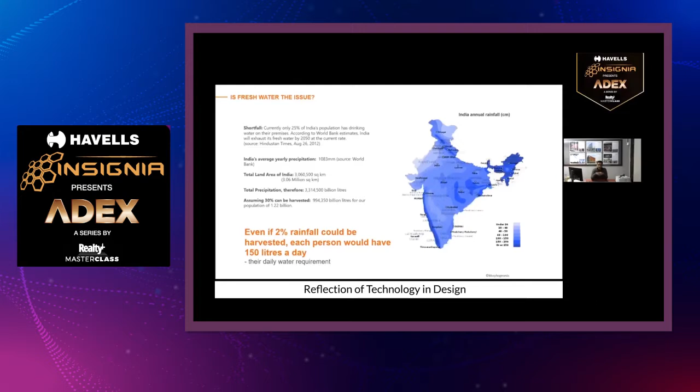We were looking at our cities and our buildings, and we had developed this sort of system where our buildings would consume energy and consume water and generate waste, and it was a one-way flow.

Uniqueness is about a set of metrics which looks at tradition, heritage, and culture. That third philosophy rose from the fact that across India, given that construction price points are extremely frugal, everything started looking the same. It didn't matter whether you were in a cold, temperate, hot, or warm humid climate, most buildings started looking the same, because they were adopting processes of construction and design that allowed for that to happen. We found ways of digging into the past to find ways to build the future, and that's where we got the unique.

And livability was essentially about engaging not only the client and end user of our buildings, but trying to engage the people who built that building.

Now, CO2 emission and fresh water, this is all benchmarked to the ECBC, the Energy Conservation Building Code of India, which is like a green building standard. Based on those standards, all our buildings go through post-occupancy evaluation, and we keep track of those numbers, of what these buildings are achieving today, over 2.5 decades.

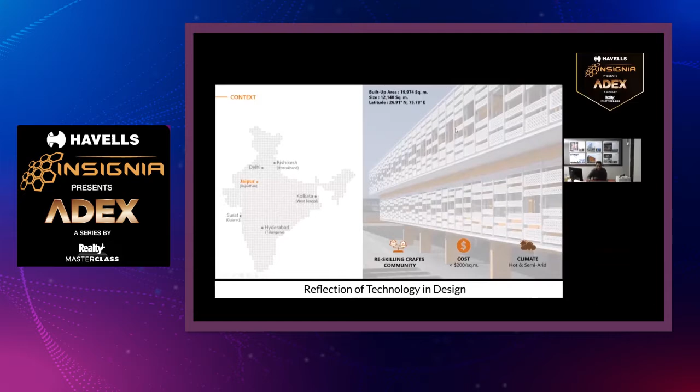The first, of course, was cost. I'm sure a lot of people here may not be familiar with cost of construction, but this project was built at $200 a square meter with all interiors and all the energy infrastructure, everything all told, which was virtually impossible at that time. And of course, a climate like Jaipur, which goes up to 48, 49 degrees Celsius in summer but can drop to close to zero at night in winter. We began thinking about how we were going to be able to build this building.

The first thing that came to our head was to throw out the air conditioning. Because once you throw out the air conditioning, you reduce all the electrical equipment, but more so, you reduce the fact that power generation is also done locally with diesel generating sets, and you get rid of that too. We studied a lot of traditional architecture. We used computational models to understand how step wells work, why they're cooler at the bottom than the top. We understood evaporative cooling, jalis, ventilation, shading.

So we mapped out a 200-kilometer radius. We said every material we use will come from that, because transportation costs are extremely heavy.

The other thing we discovered at the time was that the temperature of the earth about 3 meters below the surface equals the average temperature of the region. In Jaipur, which goes from 0 to 48, 49 degrees, the average was floating around 25. We said, that's very useful — which is why step wells, if anyone has visited India and gone down into one, naturally feel cooler, because earth banking along with evaporative cooling is a phenomenal cooling mechanism. It's an underground air conditioner, naturally driven.

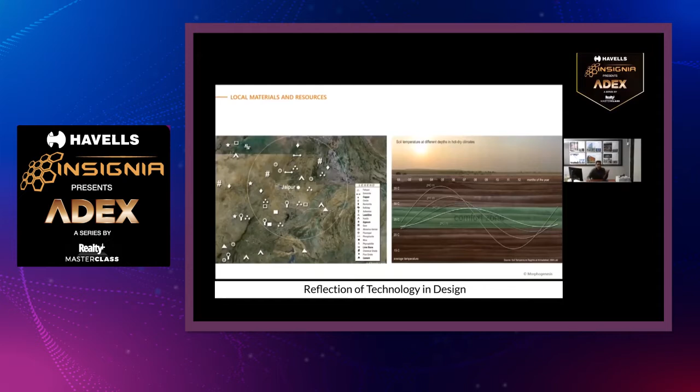Typically, any institutional building in India would be built as a block, with open space around it for recreation. But in a desert climate, that open space is really worth nothing, and these large outdoor spaces become mostly unusable through the year. So we said we won't build vertically — we'll spread the building out and use the whole building as shade, like a tree, and therefore the space under the building becomes viable. We did a very optimized, simple rectangular form, the idea being to decrease the surface area exposed to heat gain.

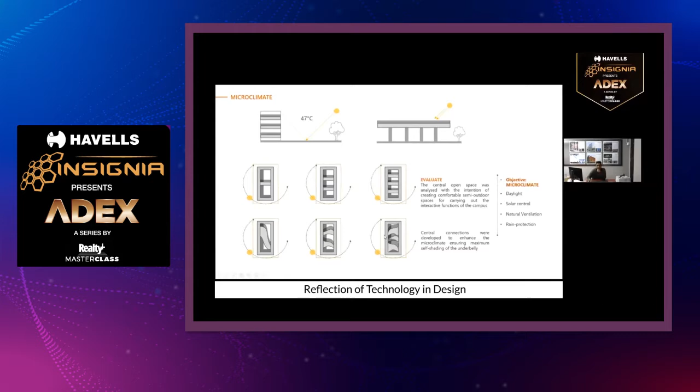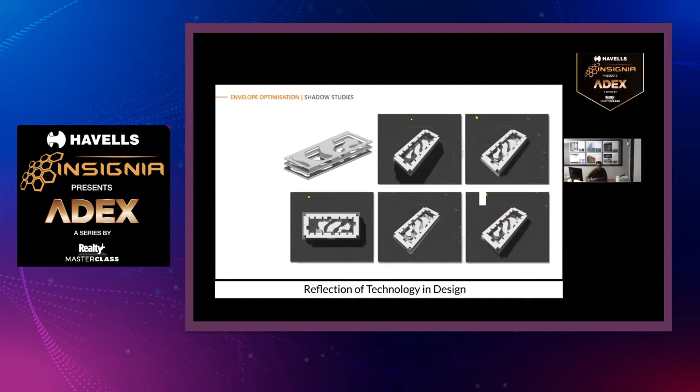And we went through a series of courtyard morphologies. The idea really being to keep the sun out, but let the daylight in. I'm not going to show you these diagrams, all of you probably know them very well. But the idea was to develop, and because it was a design and fashion school, the emotional element was that if you were inside this rigid form, driven by our environmental criteria, the courtyard should not be a rectangle and enclosed. It should flow freely like a Mobius strip. That was the model when we began about a decade back.

To achieve the parameters of no air conditioning in a desert climate, we sunk down 3 meters. We recycle all the rainwater, and we recycle water from the toilets by filtering and using a treatment plant. And we created our own step well, a Bavli in effect, which allowed for evaporation through the courtyards and cooling the building internally. That negative space, if I may, was pulled out of the program.

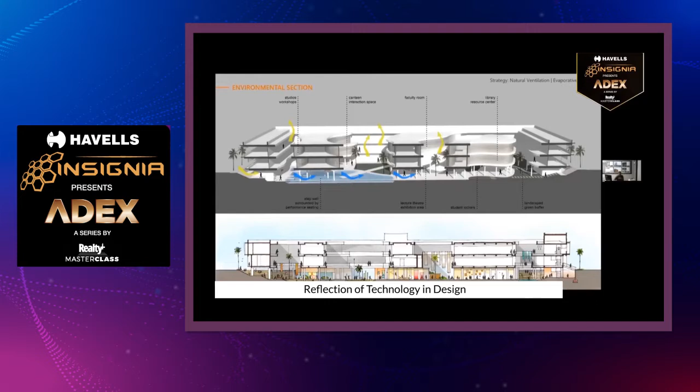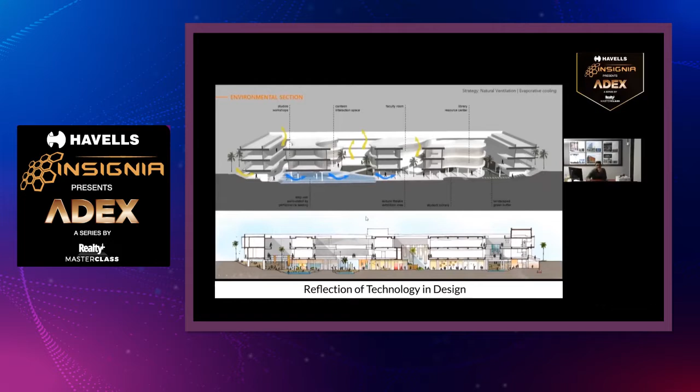So we were supposed to build about 25,000 square meters. We did, we built about two-thirds of that. And that entire area underneath, which to date operates at about 28, 29 degrees Celsius naturally, is used for an outdoor cafeteria, for various functions, performances, etc. That whole underbelly section was designed to do that. These are just some of the pictures of that step well that we created.

All the water is harvested, not a single drop of water leaves the site. We were just trying to work with limited resources effectively. And obviously the whole thing sits in shade, it captures the wind flows and cools the building down.

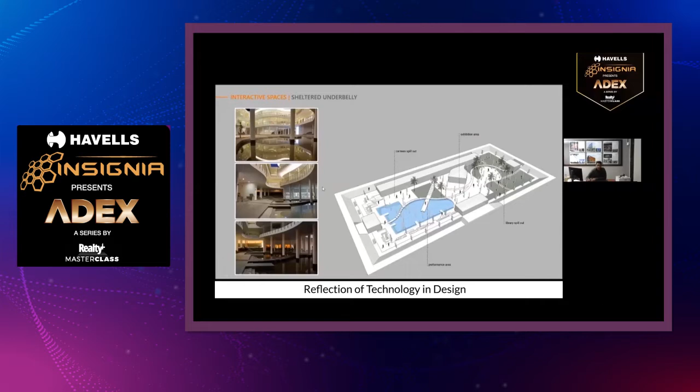We looked at insulation. Insulation was very critical for a project like this in a desert climate. There was a local community that made pots. We couldn't afford the expensive 50 mil glass wool or rock wool insulation, and we thought that pots, which were used traditionally, would make for great insulation, because air is a great insulator. We use these inverted pots with a layer of screed on top for insulation. The pots were made on site by this local potter community.

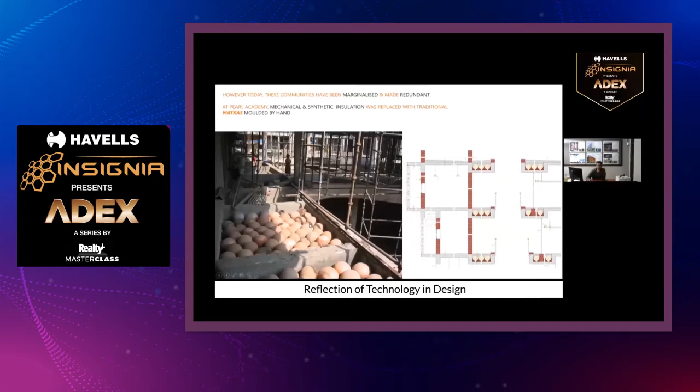For the external skin, we kept our window to wall ratios very optimized. We're at about 20 or 25%, providing adequate daylight. And we created this buffer space, which is essentially a service space and a screen. The screen is made by a local community who make cement concrete jalis on a very simple system, and we ran all the services on the outside.

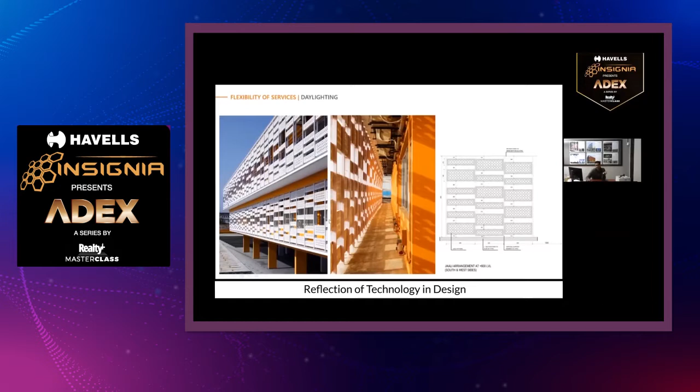So the screen allowed for the fact that the entire windows go blinds-free, and the design of the screen changes based on the orientation. All the services are openly accessible. The sprinklers run here, and we use the sprinklers as a facade cleaning system, because once a month they're supposed to test and flush it, so that cleans it up. And that's the building when it was finished about a decade back.

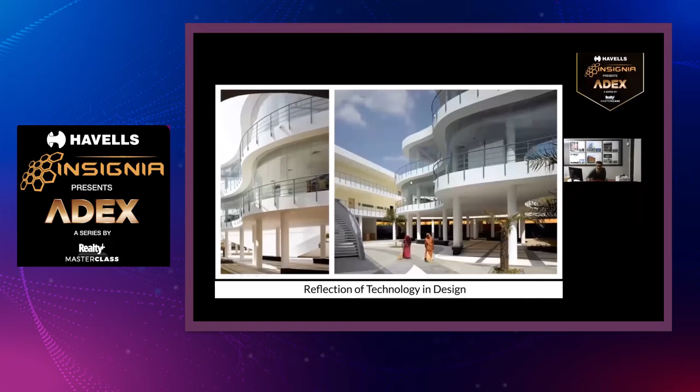So all the materials, the stone, everything here was from within a 200-kilometer radius. We did achieve the price point.

And this building went on to become very popular with various schools of architecture. They've gone and studied it. We've had students from various programs and masters programs studying sustainable design, recording temperatures and seeing it. And for the last decade or so, consistently in the summers, when external temperatures have hit 47, it's hit 29 degrees inside without air conditioning. It runs on an energy performance index of about 25 to date. Very simply, we get the bill that just divided out.

And whilst it was being built, it gave a certain level of employment to the local community, and that gave us a lot of inspiration.

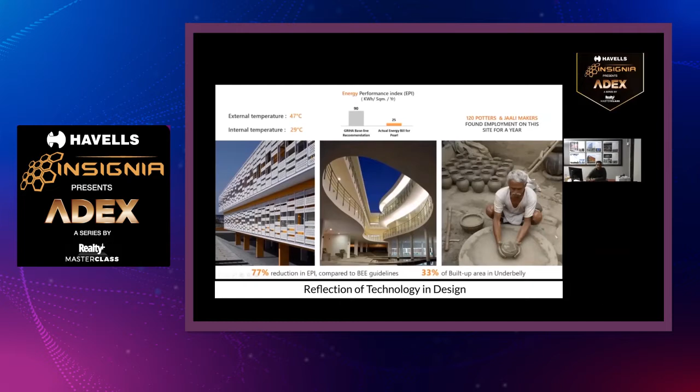And we thought that, if it was possible to get an 18 degree delta by passive design, and it was possible to create something at these price points pushed by the adversity of price, then what is it that we could do as we moved on? And that's when we started putting more formal metrics.

And which is why I'll jump to a very different kind of building, which is the British School, in Delhi. That's a composite climate. And here budget was not an issue. Our brief was, to begin with, because it was the British School, that they wanted it to be centrally air conditioned.

All British schools, pretty much all across the world, are either centrally heated or centrally air conditioned. We argued that if we can begin to achieve as much as we can naturally, then we will do so. This project started about 6 or 7 years ago.

We then spoke to the clients, which was essentially the High Commissioner and the board, and we said, why don't we look at this 5-acre site and try to do India's first net zero energy, net zero water, net zero landfill waste-to-landfill kind of building. And I said, fine, let's give it a shot.

So we did the math on the water, and from the 5 acres of land we had, I won't go through the calculations, but we could support a population of about 1,300 students. We said we'll do this in reverse. The notion of carrying capacity comes from the fact that what the land can afford in terms of water and energy is all that we will build. And 1,300 students worked very well for them.

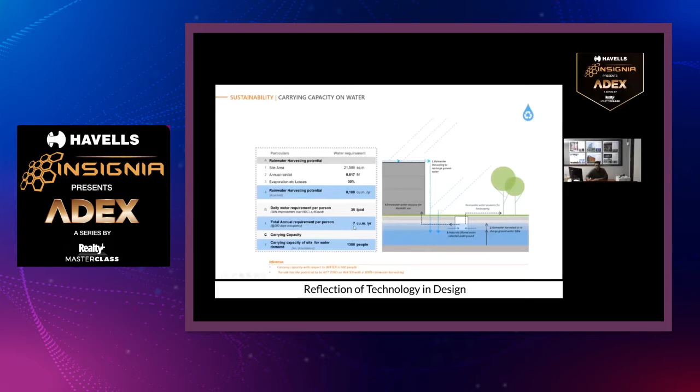We took the same 1,300 people and worked out how much we needed to build - about 20,000 square meters for fitting out an Ivy school. We were trying to work out the correct ratio of rooftop solar to number of levels we'd need to get to net zero, and therefore what target EPI we needed to achieve. After a lot of back and forth, we came to a 4-story building with a target energy performance index of 56 kilowatt hours per square meter a year.

That number would, by necessity, drive a lot of passive design, where a lot of the heat loads and lighting loads would need to disappear. That's when we would be able to be net zero on water, net zero on energy.

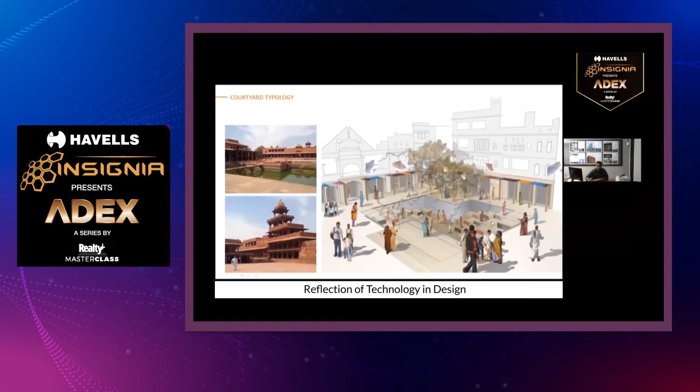Again, we looked a lot at, in Delhi, a very old city called Shahjahanabad. We looked at how those morphologies worked, how some of the earth banking worked. The other key area was safety and security.

Because we were propagating the idea of having open corridors, not doubly loaded and air conditioned, there was the issue of security and CCTV cameras, and we studied this idea of eyes everywhere. If you look at any old vernacular evolution of a city anywhere in the world, from when there was no police or CCTV cameras several hundred years back, the cities were designed so there were eyes everywhere. That really was security.

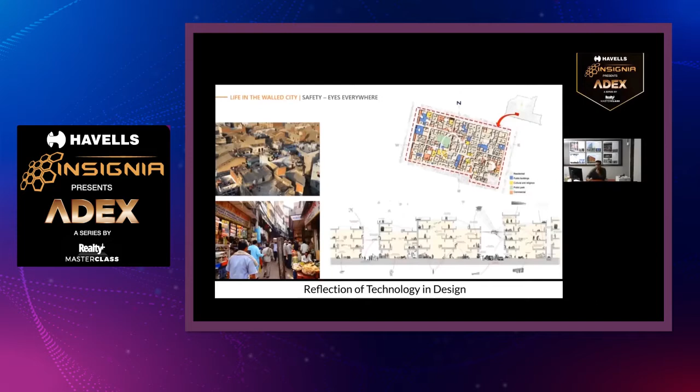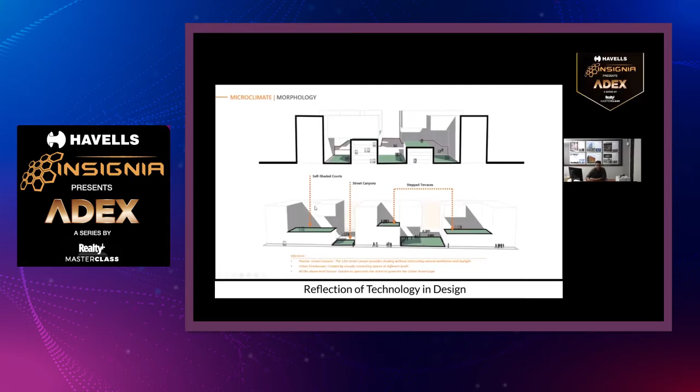So combining those two factors, we began to look at morphologies where we could get eyes everywhere, step terraces, shaded courts, and we landed on this model with a rooftop area sufficient to make it a net zero energy project.

Some other small things we did: we put the labs on top because they're constantly mechanically ventilated due to fumes, which automatically creates a buffer for everything underneath. We created natural voids for wind flows to allow the courtyards to function properly.

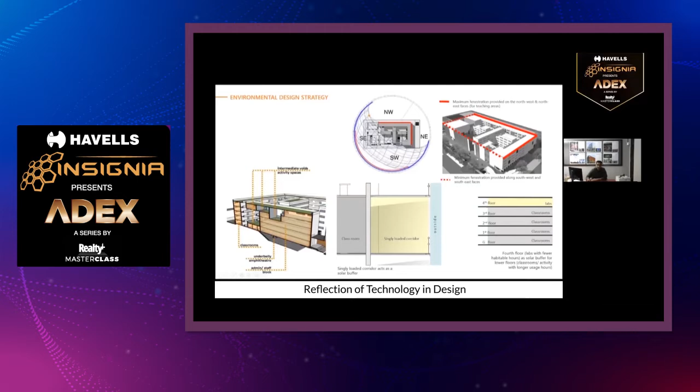Because of the site's orientation, where we pushed that form again like we'd done earlier, we began to look at the Jali formation. Most of our teaching areas were on the northeast and northwest, while the southwest was essentially a large screen just shading out the courtyards.

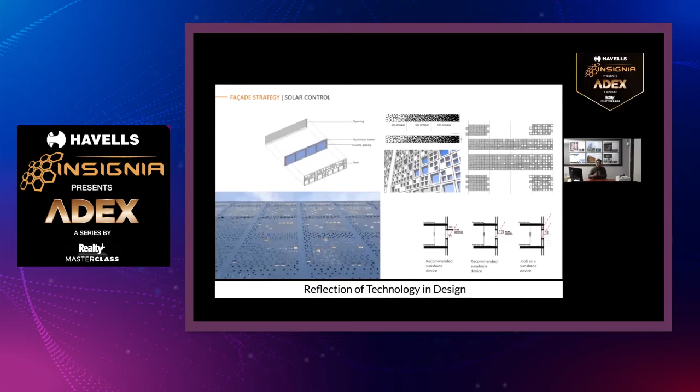A lot of this was built on site, so we came up with a construction methodology of full windows and having a secondary screen. The screen varies its opacity and density based on what's behind it and what orientation it works to.

And that's the completed building. We did a lot of modeling for it. We had the classroom, and that was built perfectly, but to us what was more important was to be able to create enough open spaces within which would be comfortable through the year. We were targeting a delta of about 8 to 10 degrees in perceptible temperature in the outdoor areas compared to the external temperature.

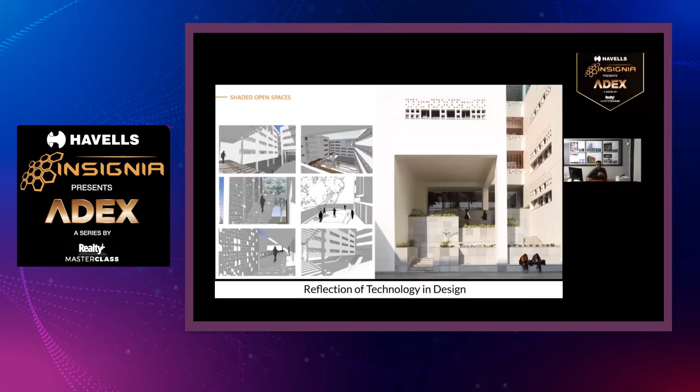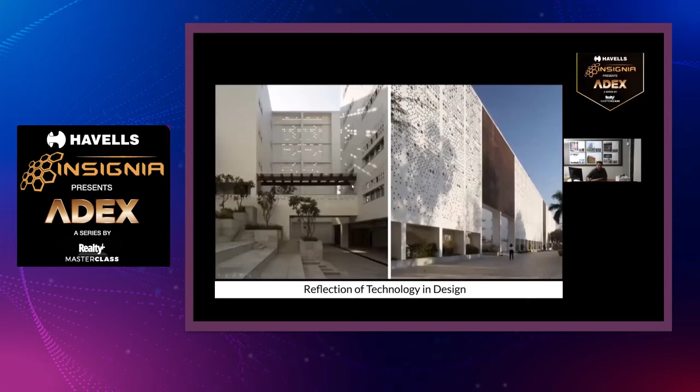And here's that project. That's the front screen that shades off the southwest and creates a full microclimate behind. Again, open corridors. What you see here are air filters because it was a British school. We didn't air condition the entire school, but we did for the classrooms, and then created these passive spaces with a lot of outdoor spaces.

Well, this is a bit old, but the trees are grown now. And that's the school. On our post-occupancy, we to date have an EPI of 52. It's the only school in India right now which got a GRIHA 5-star rating. GRIHA is India's own green rating system. And as I am a founding member of the green rating system,

I can say that it is genuine. I didn't falsify any data. But it's operating at a 52.

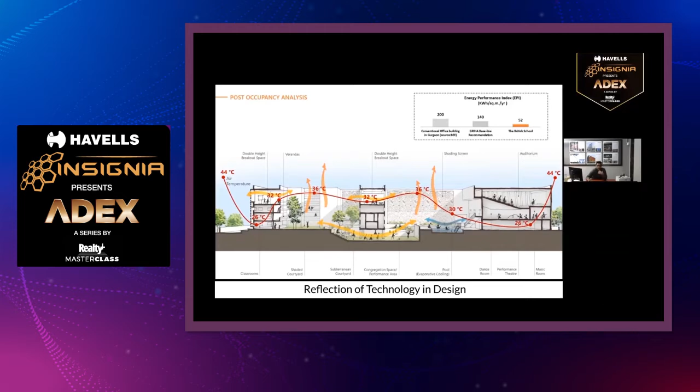So that was in that composite climate. In a composite climate, the winters aren't a problem. The real problems are, and it's not even the summer because shade, thermal mass, screens, a bit of evaporative cooling, that works. The real problem has always been the monsoon. Why it works really well in schools is that Indian schools are shut in the monsoons, that's the holiday period, and that works really, really well, which doesn't happen in other kinds of typologies like offices or residential. Which brings me to this third one.

This is a campus, a 100-acre campus for a very large technology and IT firm called Wipro. They're amongst the 3 largest listed companies in India. They do these really massive campuses, with tens of thousands of people working there. This is located in Hyderabad, in Telangana. It's a very strange climate. It's not very adverse, but it's got a tremendous amount of diffuse radiation. It barely has any cloud cover through the year, and temperatures do go up, but not that high. It has reasonable wind speeds and wind temperatures, but the glare is incredibly high.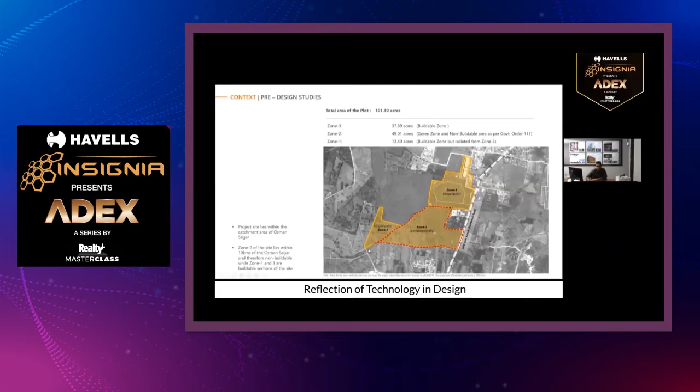We again pursued the idea of a carrying capacity. We had the 100 acres, and we worked out backwards as to how many people can we support from the rainfall. To store that water, because Hyderabad's entire geology is slate rock, it was very hard to get to an aquifer and do water exchange with it. So we really had to build a reservoir. At a 4-meter depth, we needed about 15 acres of water reservoir to support 15,000 people working there.

Similarly with energy, we worked out that if we hit a 60 EPI, then we will be able to, with 15 acres of a solar farm planned over and above the water reservoir, essentially have the solar farm shade the water from evaporation and pick up the energy. We will be net zero on both accounts. And that's what we really did. We identified the low-lying area. Everything slopes there, and we got the natural rainwater.

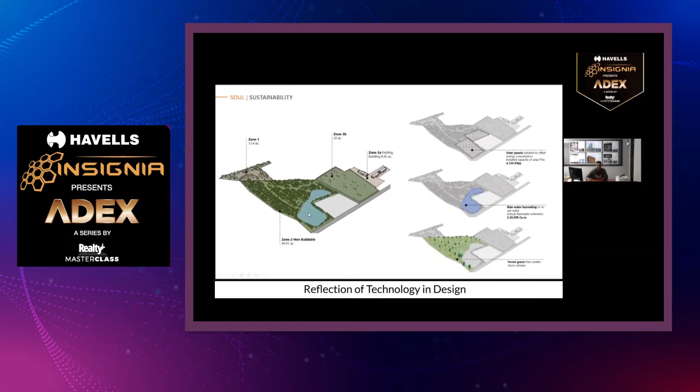It's a 15-acre lake, about 4 meters deep. It's got solar panels that sit on top of it and on the site, and shade it, so that piece of land will never get overshadowed. So we could do the solar farm, 15 acres, on the site itself. And that set up the basis of the first series of master plan.

The second exercise was how do we begin to hit 60 kilowatt hours per square meter per year, of which 25 is on primary energy - lighting and air conditioning or ventilation - and 35 is on equipment. How do we begin to get our building to work with the 25? The 35 was a given, that's all internal equipment.

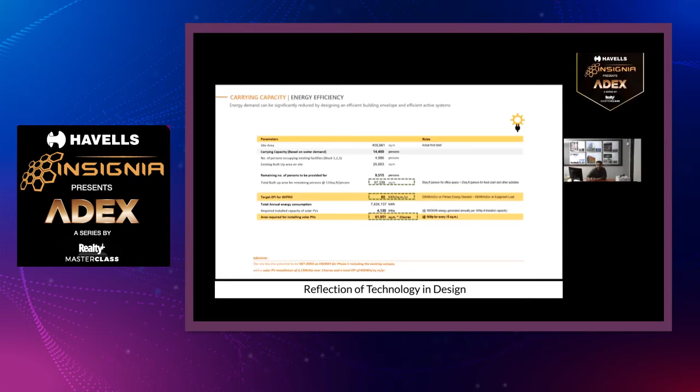The question really was, how do we work to 100% daylighting on the floor plate, and how do we bring our air conditioning requirements down to a point where, through the year - and to remind you, these buildings tend to operate about 10 to 12 hours a day, 365 days a year, because they're essentially very large tech companies.

So we began this exercise where we did about 8 of them. We did many more, but we isolated 8 morphologies built upon isolated single towers, a series of square towers, courtyards, a hybrid of the tower and the courtyard, mid-rise high density, low-rise high density, micro courtyards, and we came up with several morphologies heuristically.

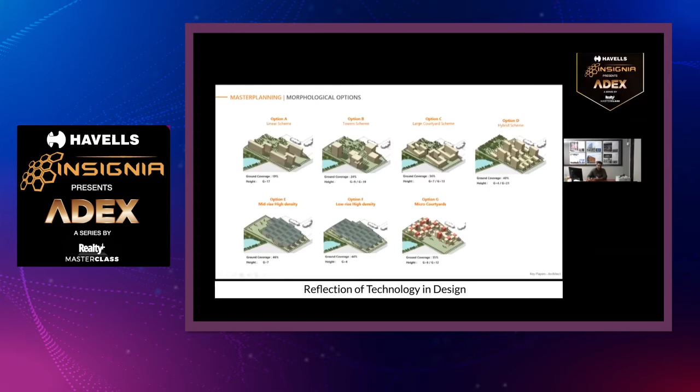And then we began to test them - various kinds of ground coverages, various heights - and we put them through a series of analysis. The first analysis that we did was, of course, for wind, because wind was critical for us to hit that 60 EPI, which is 25. We also needed to be able to get a lot of the functions from inside the building out.

A lot of the functions needed to run passively without air conditioning. Of course, where the essential work was happening would be air conditioned for various reasons - their data centers need very tight control on air conditioning, etc. But how much of this could be sort of passive, and for that we needed the wind.

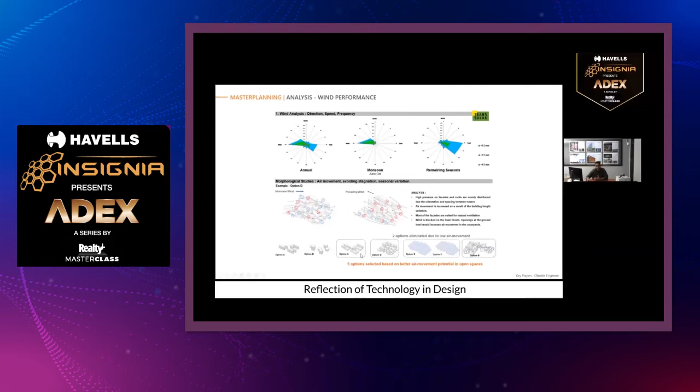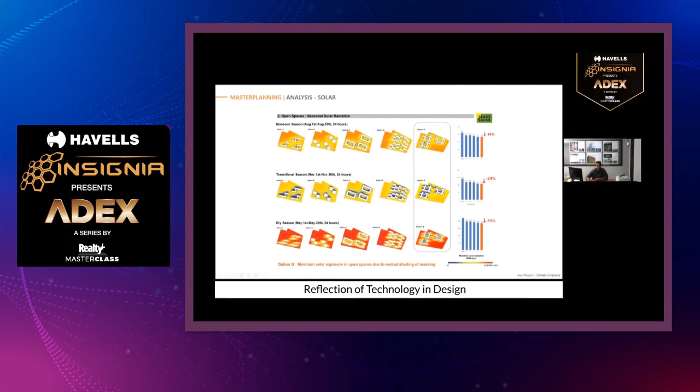Predominantly Hyderabad had an east-west wind, and we put all these various forms through that. We selected 5 that performed reasonably well. We then put them through the horizontal plane, trying to look at what, in terms of seasonal solar radiation, the insolation would be on the lower planes, and on that basis we picked up a certain scheme.

We then looked at daylight autonomy for each of these 8 or 9 different schemes, and then again began to identify - this was a highly iterative exercise between wind, solar radiation in the open spaces, and daylighting within the internal spaces, to determine what morphology would suit it best.

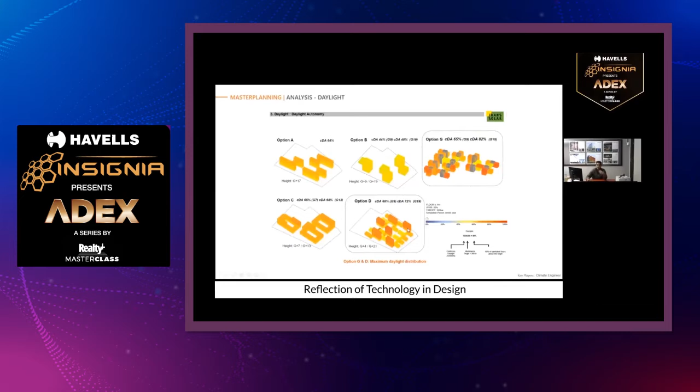Finally, we selected the option which was the micro courtyard option. After doing a series of CFD runs on it, we cleaned up the entire model - again, this was highly iterative. If anyone is very good with algorithms, this is a great one for that kind of process. And then we finally ended up with the design.

So the first phase is what is now under construction, which I'll take you through. And then we have already done the urban design for the remaining 3, so that the wind flows, the evaporative cooling, the shading - all those parameters remain the same.

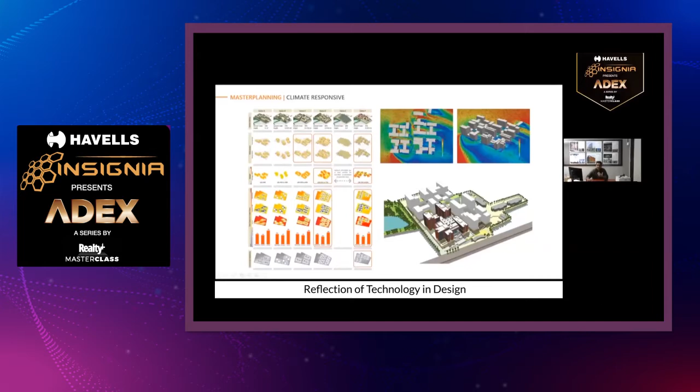Coming to that first phase, which is approximately 1 million square feet, about 100,000 square meters, we began looking at the outdoor spaces. We went through a series of analysis, looking at a combination of having no roof, no fans, no dry misting, and having only a roof like a lightweight tensile roof, a combination of roofs and fans, plus dry misting.

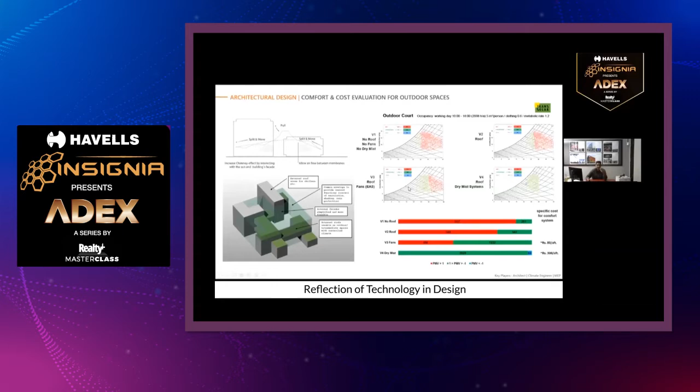We then did a cross analysis of what would be the financial savings versus these spaces sat inside air-conditioned spaces. That led to this design, which I call a large desert cooler - very traditional, a large desert cooler is essentially what used to be there before air conditioners, a box with a fan, with hay on the side where water ran down, cooled it and pushed it through. So the entire plane...

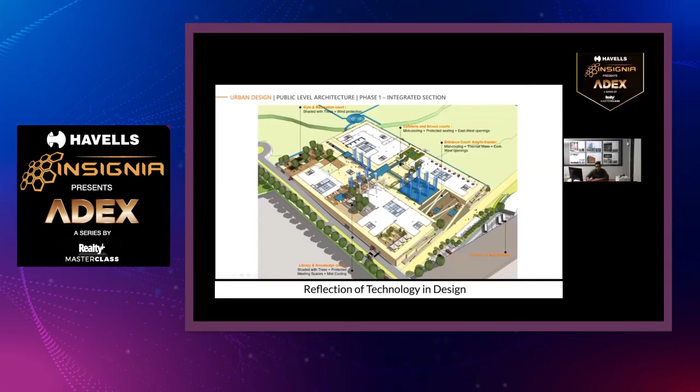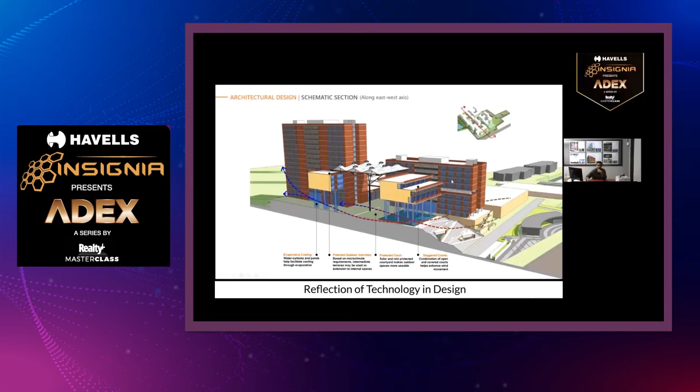...which sits on an elevated podium, was designed for those wind flows and those outdoor spaces. We worked with SBP and got this height with this tensile roof, in combination with Transsolar and us, and got this entire outdoor space working in a way that it is comfortable through the year - comfortable for rain, comfortable for summer, comfortable for winter. And by and large, this entire outdoor space now takes on primary functions.

I won't spend too much time on the indoor spaces. We went through a similar exercise of looking at various mechanisms for how we can remove as much air conditioning from the inside as possible, whether it's underfloor systems, heat recovery, hybrids, or low velocity fans, and came to an optimal solution. A lot of this is cost-based, but it's also a combination of sustainability and cost.

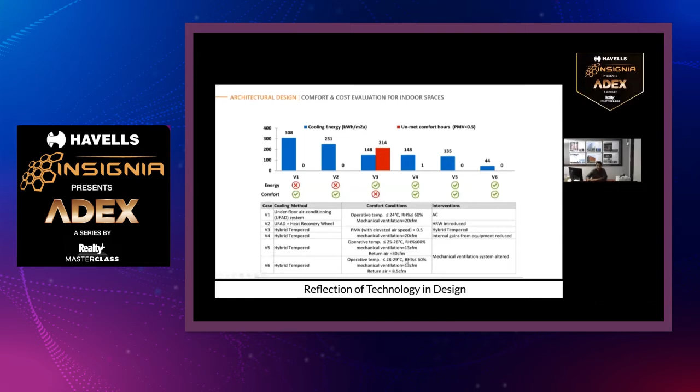Our client agreed to an internal temperature of 28 degrees, which is very useful because external temperatures here can go up to 38 to 40 degrees, and we worked out the whole system based around that. So when we finished the design...

56% of the area was under air-conditioned space, but consuming less than half the air conditioning. Typically in this region a building would consume 250 square feet per ton of air conditioning. This project operates at about 650 square feet per ton. So even though 56% of the spaces are air conditioned, they're consuming less than half.

About 35% have been moved to natural ventilation. When I say natural ventilation, and the third piece, shaded outdoor spaces, all of these are achieving thermal comfort conditions through the year—greater than 90% of thermal conditions through the year.

So not only did we manage to get about 10% of that area outside, which is nearly 10,000 square meters—cafeteria, gym, recreation, library are all in that outdoor shaded space I showed you. We have outdoor meeting rooms, which were removed from the inside area, and of course the Arrival Plaza, and in the naturally vented spaces we have various other functions.

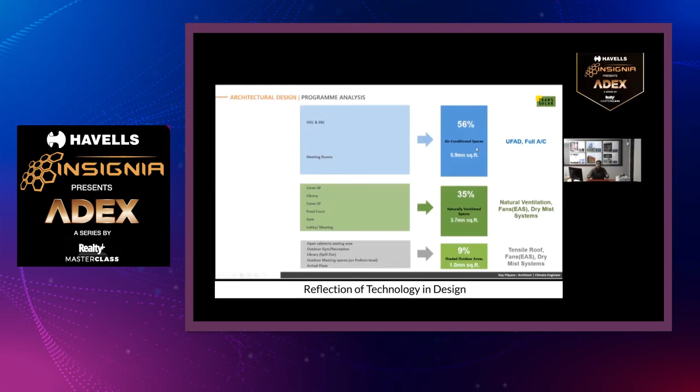So effectively, only half the building is air conditioned. This typically would be at 100%. Okay, so a dramatically different project.

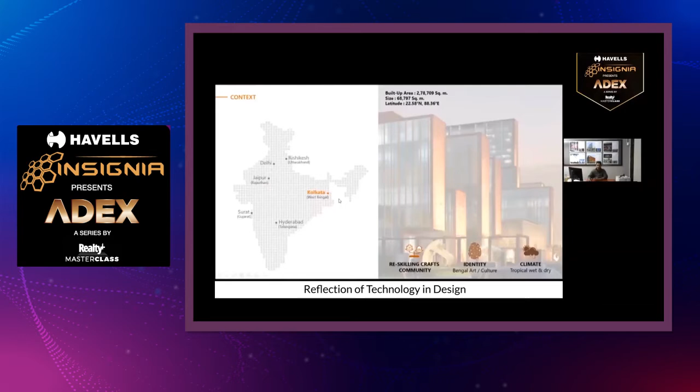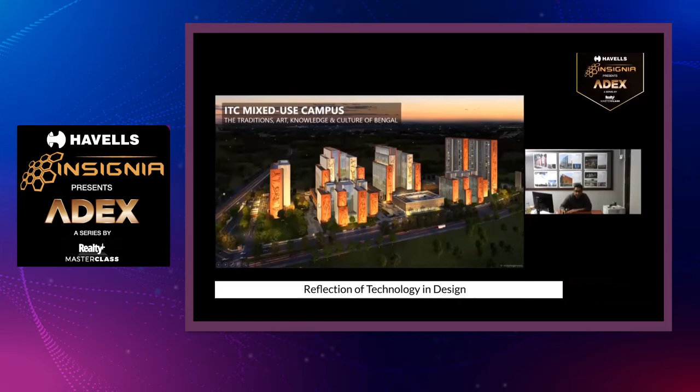This sits in Kolkata, the extreme east of India. It's got a warm, humid climate, extremely humid, and temperatures don't change much through the year. It's very close to the sea, but it's also in some senses the cradle of civilization—a lot of the first universities, the first art, knowledge, culture, music, was born in this part of the world, in this city particularly, and we began looking at the site.

The total area here is about 3 million square feet, about 300,000 square meters, and it's a 17-acre site. We did the math on this—we couldn't push this one to net zero because, like I mentioned earlier, any environment that is highly humid makes it difficult. The city maintains greater than 70% humidity pretty much through the year, and therefore in a mixed-use environment consisting of offices, hotel, conferencing, data centers, etc., air conditioning was inevitable.

However, what we started thinking about was what we could do in terms of the entire site, and therefore we set up a site plan where we could maximize the wind flows through the site.

And all the buildings—what we did here was, because Calcutta sits on a 22 degree latitude, which is pretty much the tropics, we tilted the buildings 22 degrees to pure north. That allowed us to essentially shade from one side, because when the sun overshoots you end up shading from two sides, and it led to a 25% reduction in solar exposure. We found this very interesting.

But every time you tilt a building towards the east from pure north, by the latitude the building sits at, it actually helps cut down solar exposure naturally, which helped reduce the amount of shading we had to put into the building in the first place.

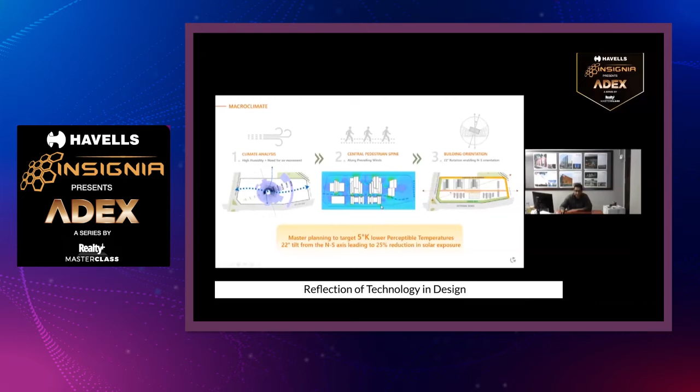Once we had that east-west axis, we also left a lot of cross axes because we wanted natural ventilation. Wind speeds are not very high in Calcutta—about 2.5 meters per second—but over the year they change direction, which is why we had to keep this layout very free, as opposed to the previous project I showed you, which was very fort-like but very channeled.

This had to be very open and transparent. I want to go to the landscape design of how that works with the wind flows.

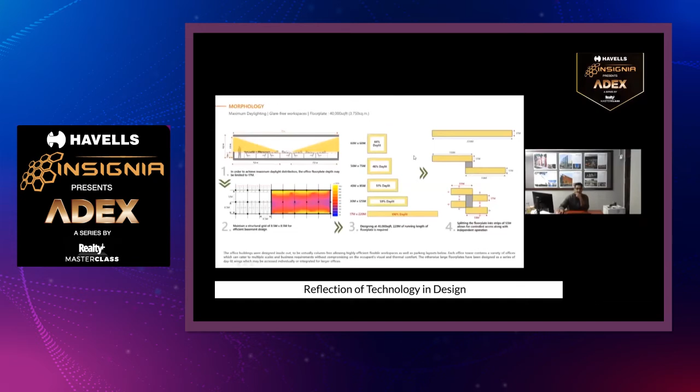The second problem we had was that a lot of this was very large floor plates, 40 to 50,000 square feet. By and large, what happened with large floor plates traditionally is you get these very deep 60 by 60, or 50 by 75 meter deep floor plates, and your daylighting drops to, on a CDA or daylight autonomy measure, anywhere between 40 to 50%.

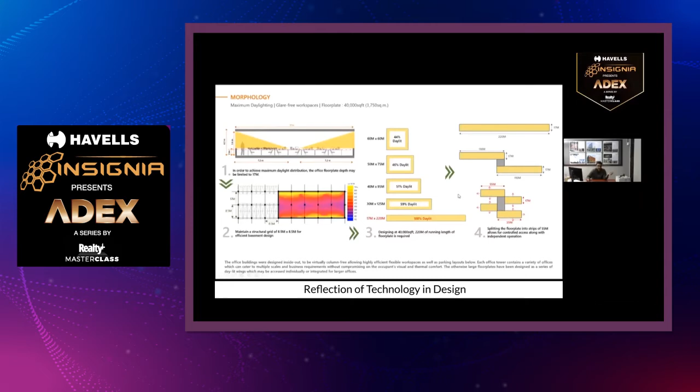We took the same area and changed the morphology of the building so we could push that back to about 90 to 100%. The point is that you don't have to work with the form as a given. If you go iterative, the same exercise allowed us to break this up, deciding where we put our core and how the form breaks up to get 100% natural daylighting.

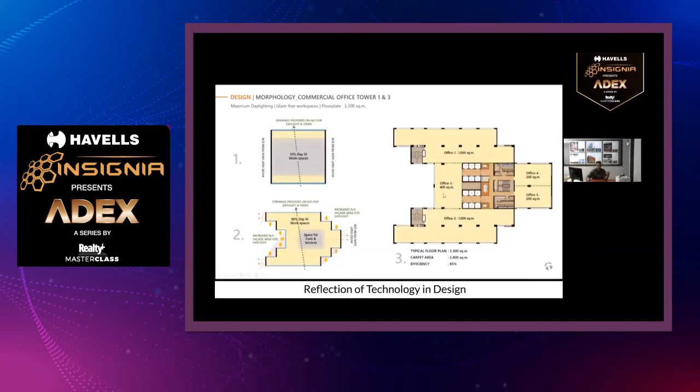So that was the final piece of design when we finished up, about 2.5 to 3 years back. It's been in construction ever since.

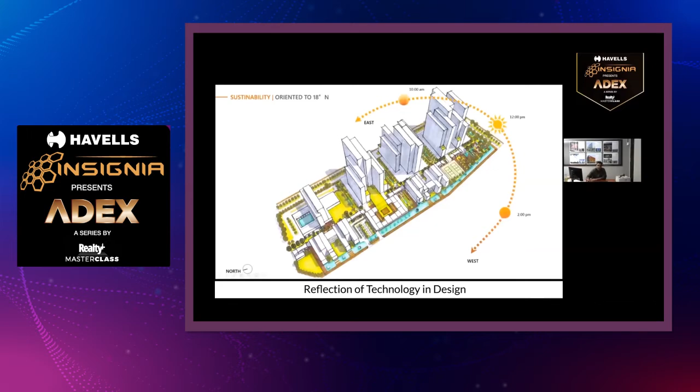We then began to look at the fact that now we had a microclimate on the site, as you can see, this is all reasonably well shaded and well ventilated. We started working with a lot of the local craftsmen, which goes to my earlier point about how we work with local communities. We found a lot of this tradition, art, and knowledge, and brought that back.

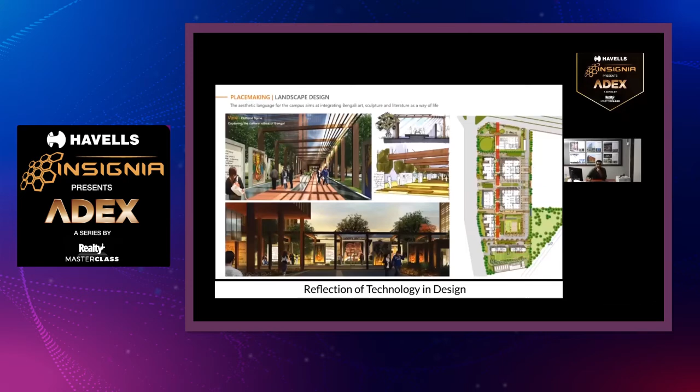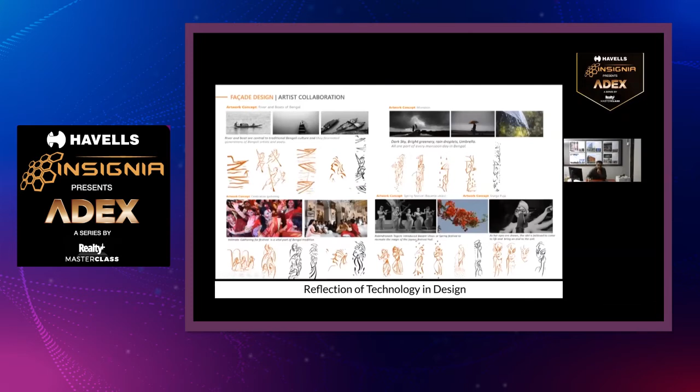This is a culture and art gallery, naturally ventilated, naturally weather protected, 17 acres of outdoor arts and crafts museum. We worked with a lot of the local art schools and local craftsmen who had this incredible craft of making sculptures. We then used a lot of the traditions of Bengal, of Calcutta, and abstracted them into graphic artwork that the artisans could work with.

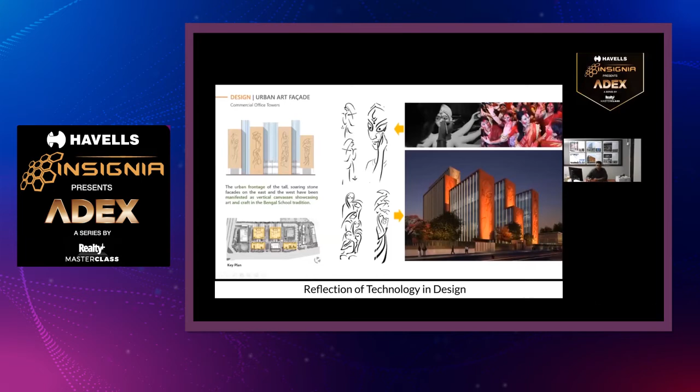We then started using the west and east facades, because all our buildings were north-south, albeit turned 22 degrees, and worked them into creating this urban art form, which of course provided great amounts of insulation, since they were carving local stone. We also worked with the local alphabet, again using the stone, coming up with this 500 meter by about 100 meter long urban art facade.

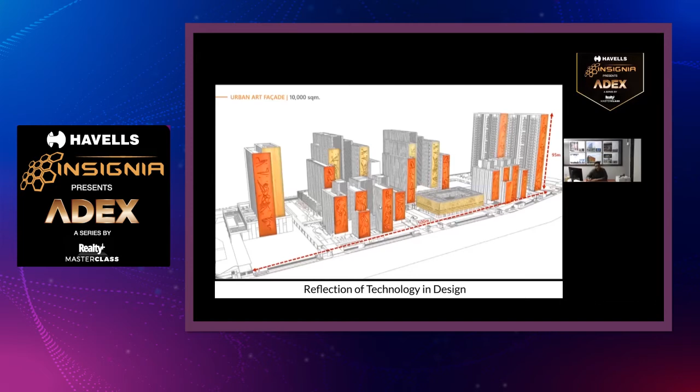This is all on the west side, a lot of it crafted by local craftsmen, and again on the other side, on the east as well. So that's the project, again under construction, where a lot of this is being done on site.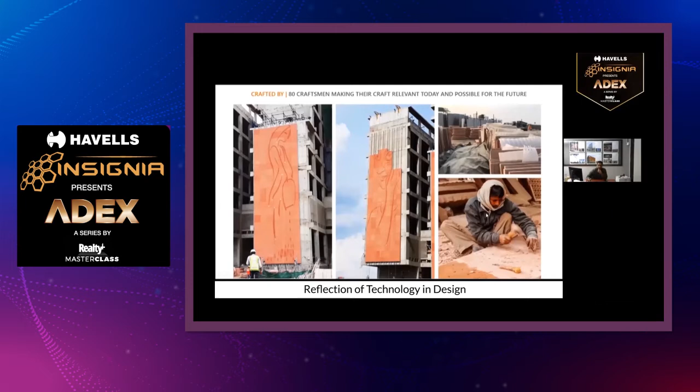We did this as a very deliberate move, because these are dying communities, craft communities are dying communities, and I think the more we work with them, the more we learn from them. They seem to have a better heuristic understanding of what we understand computationally. This entire 500 meter by 100 meter high urban facade is being put up by these local craftsmen.

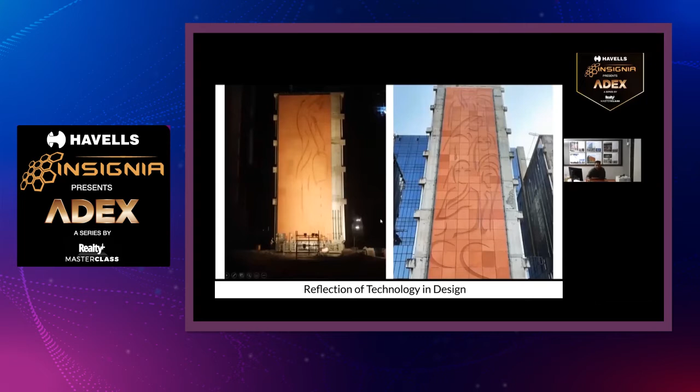Eventually leading to that on completion. So we managed to get, in a very humid environment, an EPI of 43 by a lot of these measures.

We are 90% daylit, zero glare, which is critical, because what you really don't want to do is draw the blinds when you get glare and then switch the lights on, and it all goes south. So glare free, 90% daylit, window to wall ratio at 25%. Our facade is at 1 watt per square foot, envelope load design, and the entire site is fully ventilated.

That's how we managed to hit the 43 EPI. Even in a humid environment, we've got a 5-degree delta in perceptible temperature, so at 36 degrees down to 31 with ventilation. It works really well, even when you stand there on the site today.

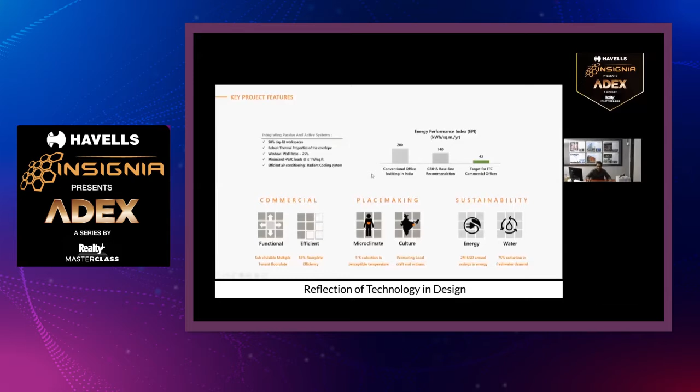Thanks, Architect Manit Rastogi, for sharing those fine examples of combining passive design, advanced technologies, and local craftsmanship, and for highlighting those interesting facts about net zero buildings. Mr. Vivek Yadav, you just saw how design and technology have been combined in Architect Rastogi's projects. What do you have to say about combining these two things for sustainable and green buildings in India?

I think this question needs no answer now, because the entire presentation by Architect Manit Rastogi was centered around this, and how beautifully each project he highlighted was using technology. In the beginning, when he asked what is technology, I mean, you're putting science to use in creating sustainable and even net zero buildings. I'm really impressed, and I'm quite sure the audience listening, especially the designers, would have got huge inspiration from the entire presentation.

But we, as manufacturers, how we can assist in creating those structures is by giving technical solutions which will aid the output desired by the architect. It could be in terms of supplying equipment like solar, or giving lighting—though natural lighting is most desirable, in areas where it's not possible to design, we can give the effect of natural lighting inside a building using current lighting technologies, based on the circadian rhythm of the human body and how it perceives lighting from morning till evening.